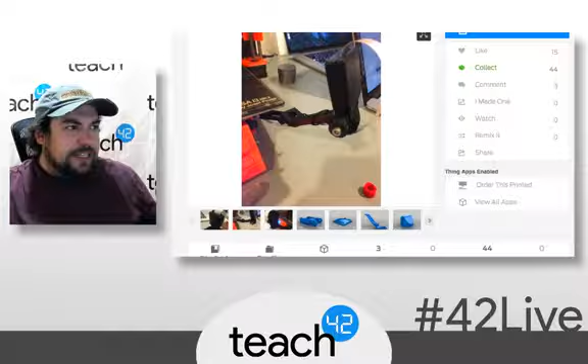What I thought was kind of interesting is you print out all these parts and it gives you a hardware list of the nuts and bolts that you need to get. What I thought was really interesting, though, is this one, if you look at the very bottom of this picture, it's this part in particular. Actually, I should have loaded it up so you can see it.

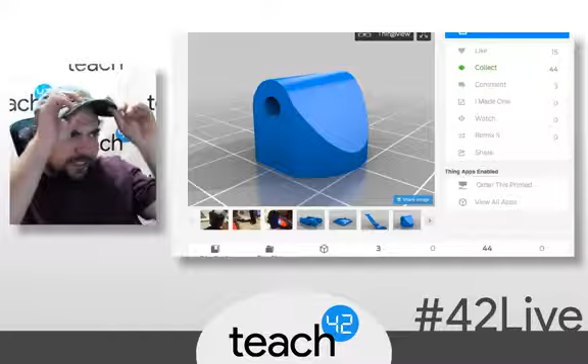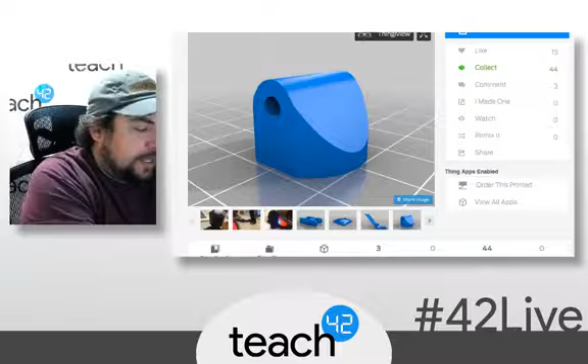This attaches to the swivel where you can rotate the camera back and forth. However, in order to do it right and keep things tight, they wanted the nut to actually be inside the plastic. So this is the first time I had to do this, where in the model there's a hole, a nut-shaped hole inside this piece, completely enclosed in plastic. At the 5mm mark, you're supposed to pause the print job, move the print head out of the way, insert the nut, then click unpause, and it winds up covering that up with plastic so you have the steel nut embedded inside.

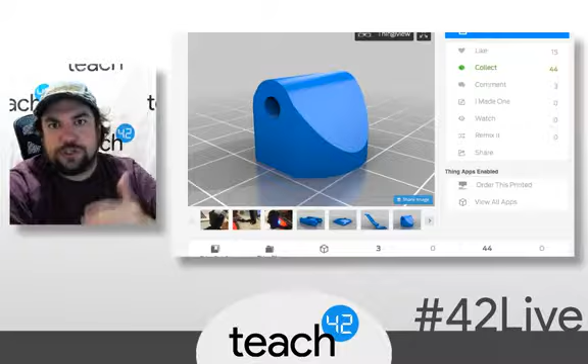There's a couple different ways to do that. One is in the print file you send to the printer - you could edit the code, and after a certain mark, right before it starts printing a certain layer, say layer 83, you can have it pause the print job and move the head out of the way automatically. Or if you just watch the printer, when it gets to that point you can see it on the screen, it's about to hit the 5mm mark, you can just hit pause, change the axis, move it out of the way, stick the nut in, then hit unpause and it continues on its merry way. So long as you do it fairly quickly, you don't need to worry about the plastic getting all over the place. Anyway, point is, first time I had to do something like that.

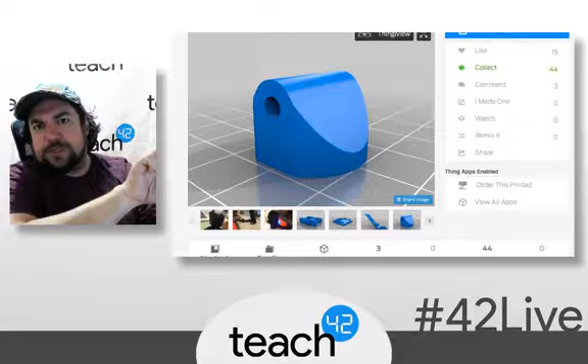It's also the method you'd use to change colors mid-print if you wanted to. If you want layers of blue then green then white, or print something solid color on the bottom but with writing in a different color on top, you could do the same sort of process. I was pretty jazzed about it.

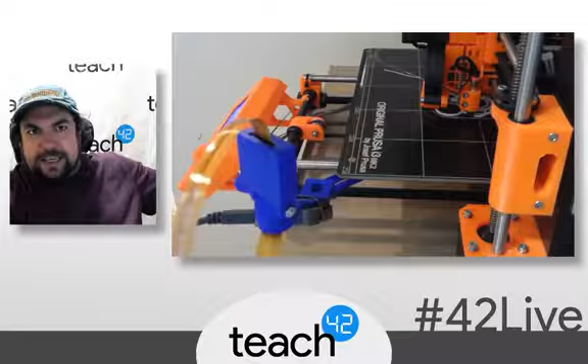And the net result is it wound up working pretty well, and this is what I now have attached to my printer - you see that in blue? That's the camera with the camera cable coming out of it. I actually right now have the Raspberry Pi Zero-W duct taped underneath the arm. I'll have a more elegant solution down the road, just haven't gotten around to doing it yet.

So as you can see, as the printer is moving forward and backward, the camera mount moves with it. So this is what it looks like - I have an IPEVO right now aimed at the printer just so you could see it in perspective, but this is what it actually looks like through the camera right now.

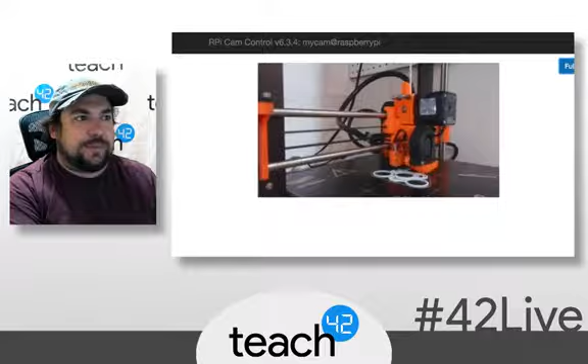I could also schedule things - I could turn the camera on and say when there's motion detected, then go ahead and start recording. And then I've got these buttons down here: record video, record image, time-lapse start, and so on and so forth. Or I could just watch it - I could turn everything else off and just watch this. I can even zoom in a little bit so you can see it a little bit better. So this is through that camera.

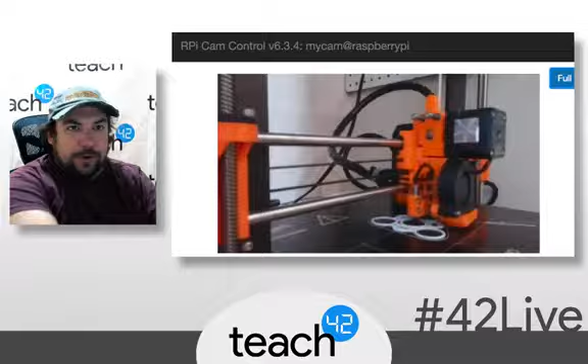And if you notice, it looks like the print head is moving forward and backwards. But if you look closely at the wall, it kind of looks like the wall is moving forward and backwards. That's because the bed is what's actually moving, but the camera is mounted to the bed, so the camera and the bed stay fixed in space and move with it all. So the net result is, when you do a stop motion, what you're recording isn't moving backwards and forwards and backwards and forwards.

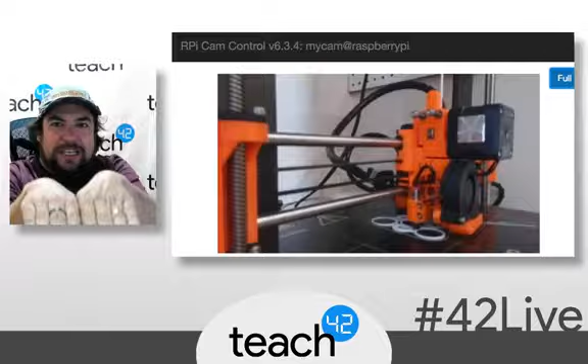It stays fixed, so it looks like it's just getting built straight up. I actually did this with a not quite 30 hour, about 24-hour print of a little Star Wars theme thing. This is the first thing that I printed. It went overnight and so on.

One thing you need to keep in mind is if you're doing a time-lapse of a 3D printer, you should try and keep the lights on. There was about a 3-hour window where I accidentally turned all the basement lights off, not thinking that the camera wouldn't have much to take a look at. But here is what that looks like.

Hold on one second. So this was my time-lapse that I recorded with this just the other day. There it is. There's the lights out. Don't worry, it gets brighter again in just a minute.

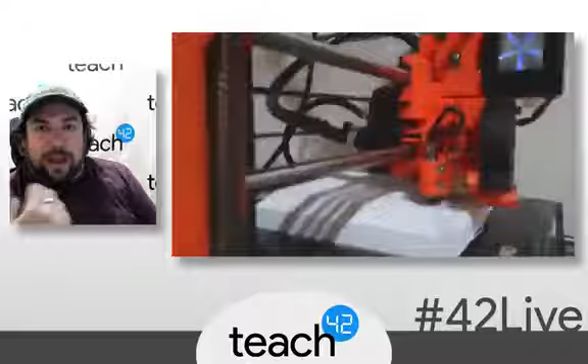This is actually about 6,800 photos. I had to take a photo every 10 seconds, which took around 6,800 photos over around a 24-hour period. I downloaded all of those. There's about 2 gigs of photos. I downloaded them onto my desktop.

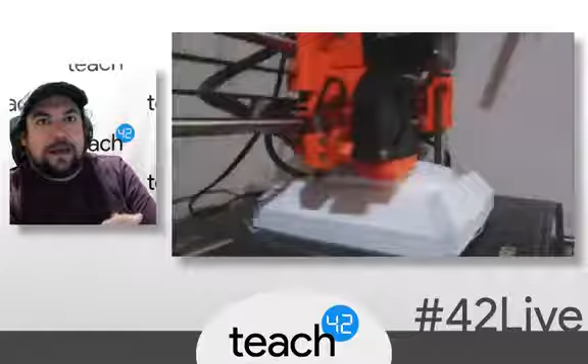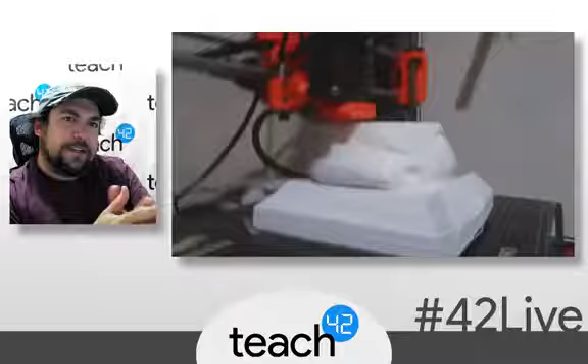I used an app called Time Lapser that did a fine job. It turned all of those photos into a video. It took about maybe 30 minutes to create this video. And then the video was still about 3 minutes long, so I brought it into iMovie, made it quadruple the speed, and now it's down to about 1 minute. You can see it comes out pretty darn good.

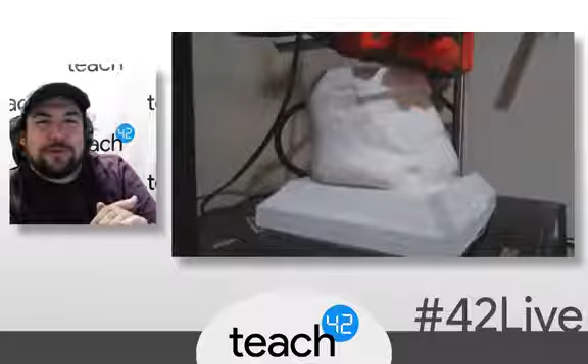The print wasn't actually perfect. That's all right, I got a few little things to tweak. But on the whole, the time-lapse video worked out really nicely.

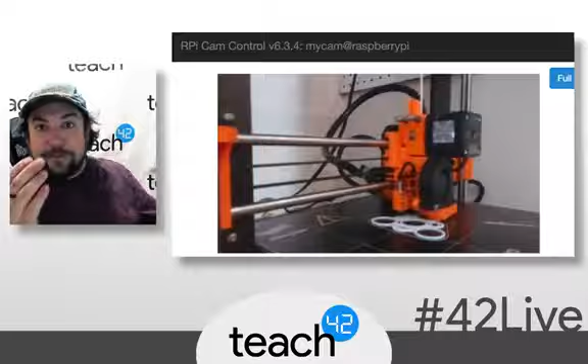Even better, as things are printing, from my phone and from my computer I can always just keep an eye on the print job and know when it's going to finish so I can get the next one started. I haven't taken the time to patch this Apache server through so I can look at it externally. I'll do that eventually. So even while I'm out and about, I can always kind of pop in on it and see how it's doing.

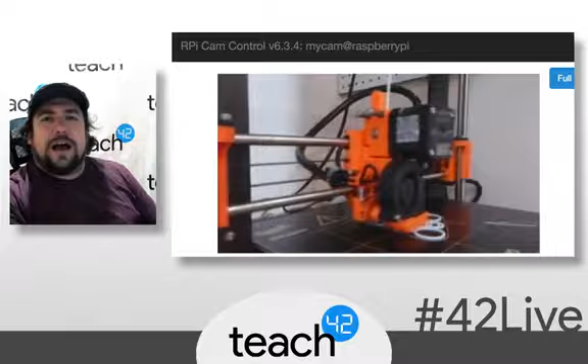But I gotta admit, it works, and it works great. Total cost of materials, about $30, give or take. So to have a spy cam, if you will, a little Raspberry Pi with camera, maybe $35. And then the printed material - so all in, including the plastic, including the nuts and bolts, I'd say maybe $40, and that includes the Raspberry Pi and all that. And that is a little webcam that you could, in theory, stick anywhere.

If you ever want to have more security cameras all over the place, yes, you could buy them online. But if you want to just get geeky and do it yourself, totally can, and this thing works great. Totally blown away by how well it works, and having an absolute blast with it. So a lot of fun, pretty interesting, and if you have a 3D printer, this is a really easy project to do, and it's a fun way to actually use the printer, and a fun way to show off the things that you wind up making.

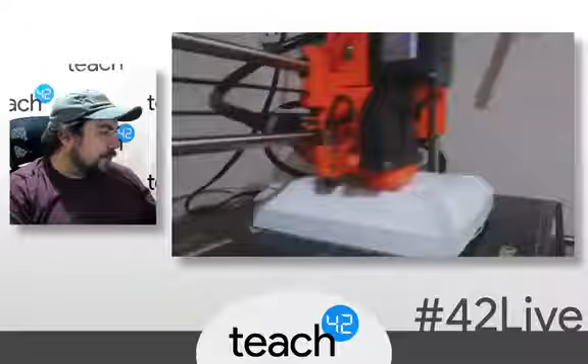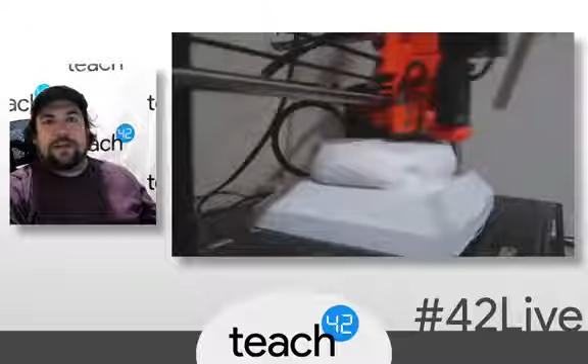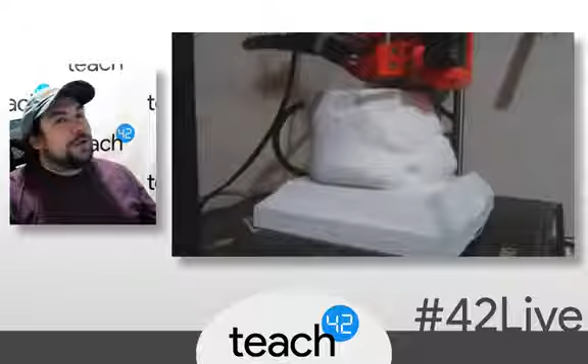But that's about it. Kind of a fun project, and hopefully in a not-so-distant future, I'll even give you a URL. You'll be able to go to teach42.com/3Dprinter and voyeuristically tune into whatever I happen to be printing at that moment. Not that I really think anybody really wants to, but why not? Sometimes it's worth doing just because you can, right? This is the tinkering phase, but we'll get to the better stuff later.